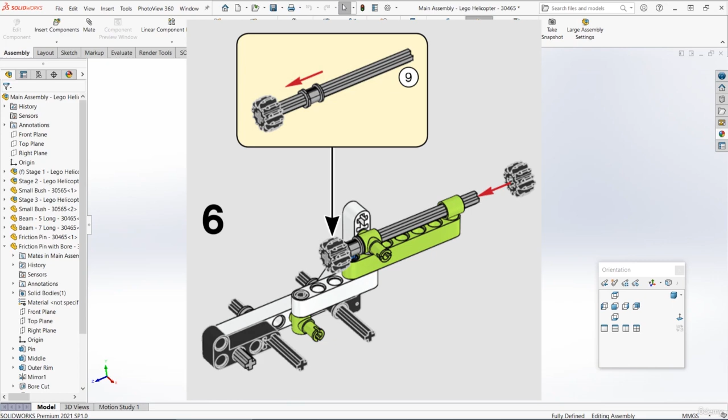Before we start adding to the main assembly, we're going to make that small Stage 6 sub-assembly. Let's go to the axle and go to File, Make Assembly from Part. Then just choose that axle and insert it fixed to the origin. This should be the axle that's 9 long, so if you've got a smaller one, you might just need to click on it and choose the 9 long configuration.

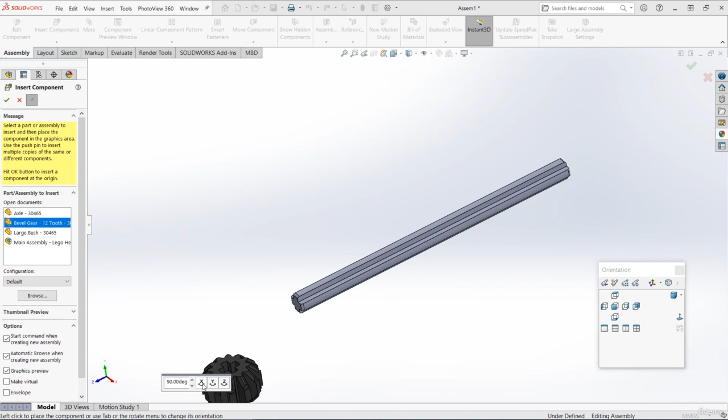Then let's insert the 2 remaining parts. Go to Insert Components, insert the bevel gear, and you might need to spin it around. Also insert the large bush, and you might need to spin that as well. Then let's add our mates.

I'm going to zoom in a little bit and select a circular face inside the bevel gear, and also a circular face on the outside edge of the axle. I'm going to make those concentric and lock the rotation by expanding the mates, right clicking on that concentric mate, and pressing lock rotation.

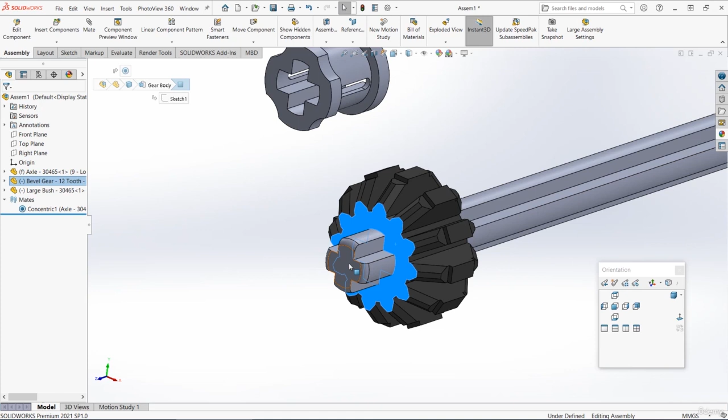Then if we look at the instructions, the end of the bevel gear is lined up with the end of the axle. So let's add a coincident mate between those 2 faces. It should look something like that.

Then next, let's position the bushing. Select a circular face on the bushing, can be any one, and also select a corresponding circular face on the axle and make those concentric.

It doesn't matter too much which way you get this round, but technically, according to the instructions, the side of the bush part with the cutouts should be on the same side as the gear. So if yours is in the opposite direction, you can just right click on your concentric mate and press Flip Mate Alignment. I'm also going to lock the rotation of that bush by right clicking on the concentric mate and pressing lock rotation.

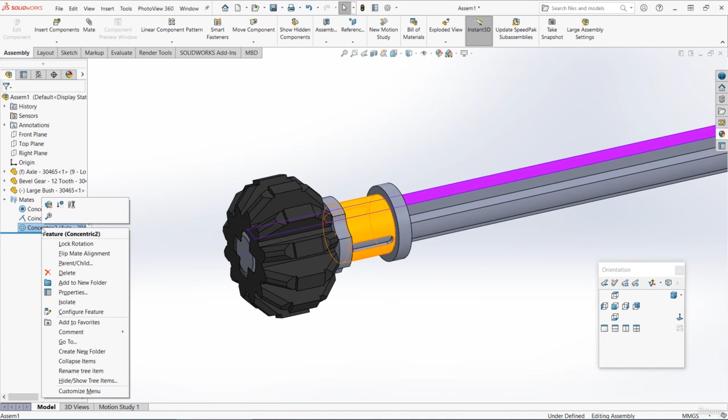Then let's just move the bush up so that it's touching the end of the gear. To do this, you can just add a coincident mate between the bush and the gear. And there we have our fully defined assembly.

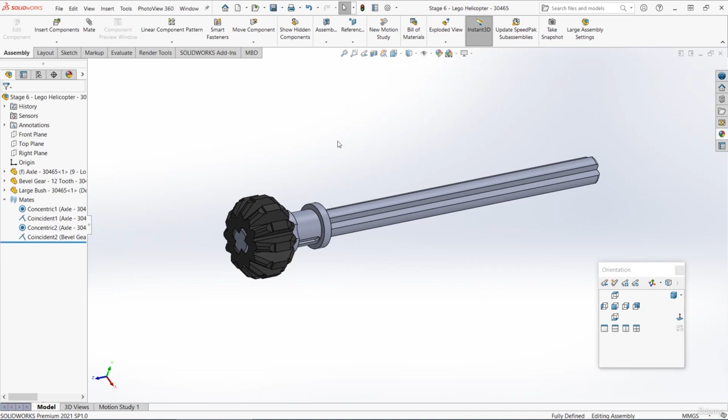So let's save this and call it Stage 6. Now we can add this sub-assembly to the main assembly. Let's go back to the main assembly by pressing Ctrl and Tab, go to Insert Components, and choose that Stage 6 sub-assembly.

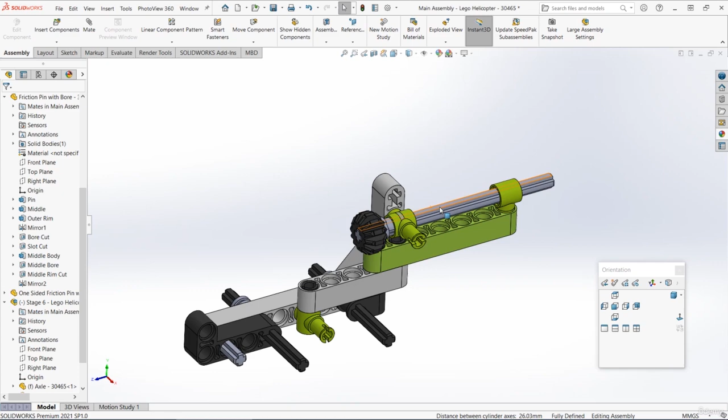I'm then just going to line the axle up with the holes that it goes through. So I'm going to choose a circular face on that sub-assembly, and then choose one of those holes and make those concentric. For this one, we don't need to lock the rotation because we actually want this part to spin, because that's what drives the rotor blades and the tail rotor.

We are going to set the distance though, so I'm going to select this face and also the back of the bush and make those coincident.

And then finally, to finish off, we just need to add another gear at the back. So if we hold down Control, we can left click and drag from an existing part. Let's do that with that gear: hold down Control, left click and drag, and then release the left click to place a new gear.

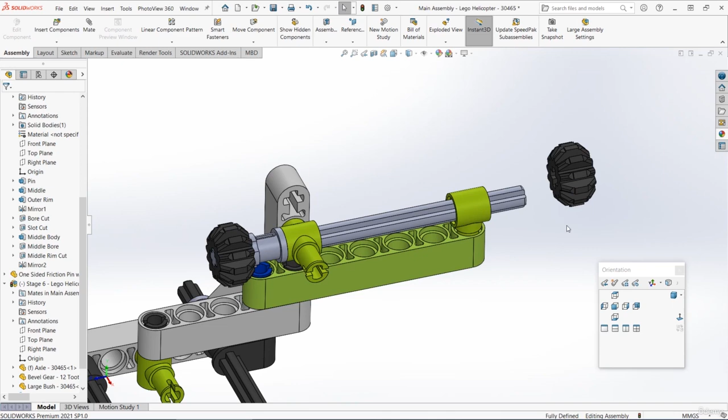Let's select a circular face inside that gear and also a circular face on the axle and make those concentric. Now at this stage, just make sure that your gear is properly lined up with your axle. If it's a bit misaligned like this, you might just need to select a flat face inside the axle hole on the gear and then a corresponding flat face on the axle and make those parallel. So it should be lined up properly like that.

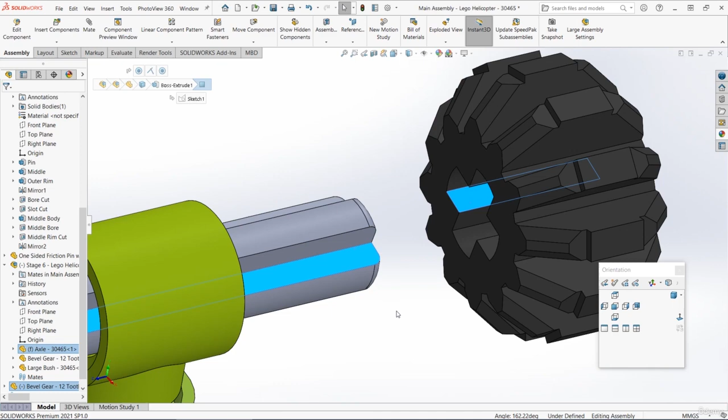And then finally, let's just select this end face of the gear and also the end face of the axle and make those coincident. We can see we've got a small gap there. That doesn't really matter at this stage, it just gives a bit of clearance to allow that axle to spin round. And if we zoom out, we can see this is basically the drive shaft that will run the tail rotor.

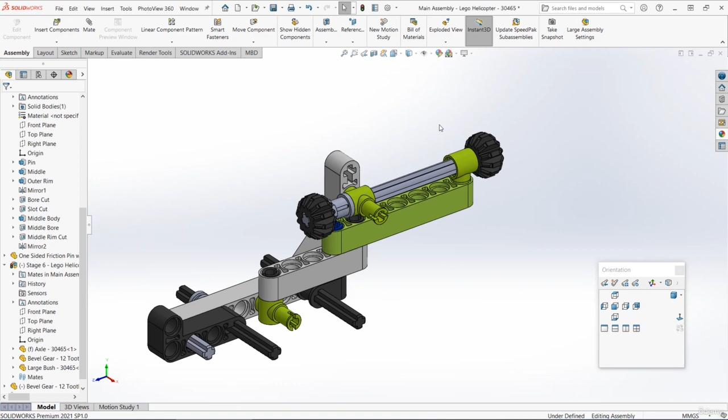Stage 6 is now complete, so you can save your assembly. In the next section, we'll be moving on to Stage 7, which only has one new part.